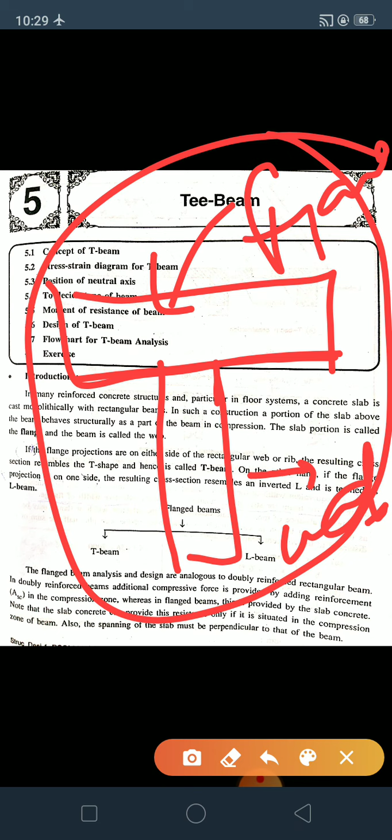If the flange projections are on either side of the rectangular web or rib, the resulting cross section resembles a T shape and hence it is called a T-beam. The cross section resembles the T shape, hence T-beam. On the other hand, if the flange projection is on one side only, the resulting cross section resembles an inverted L and it is termed an L-beam. So that is the difference between T-beam and L-beam.

If the flange projects on both sides of the rectangular web or rib, it is a T-beam, and if the flange slab projects on only one side, it is an L-beam. So flanged beams have two types, T-beam and L-beam. The analysis and design of flanged beams are analogous to the doubly reinforced rectangular beam. In a doubly reinforced beam, additional compressive force is provided by adding reinforcement in the compression zone.

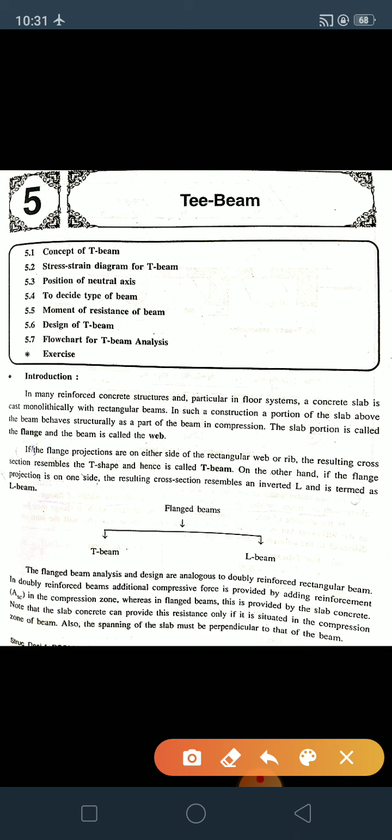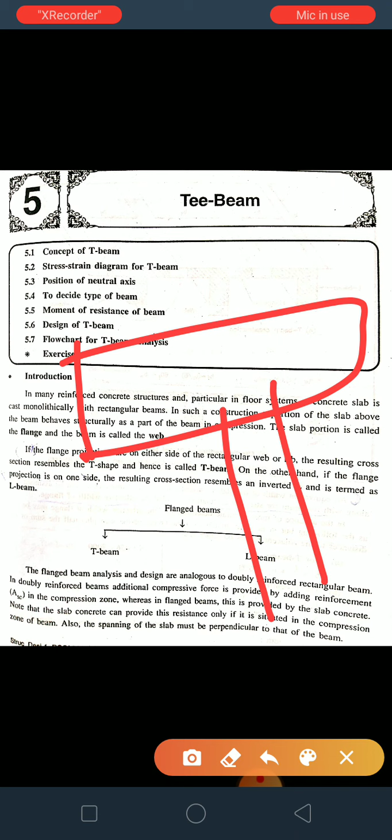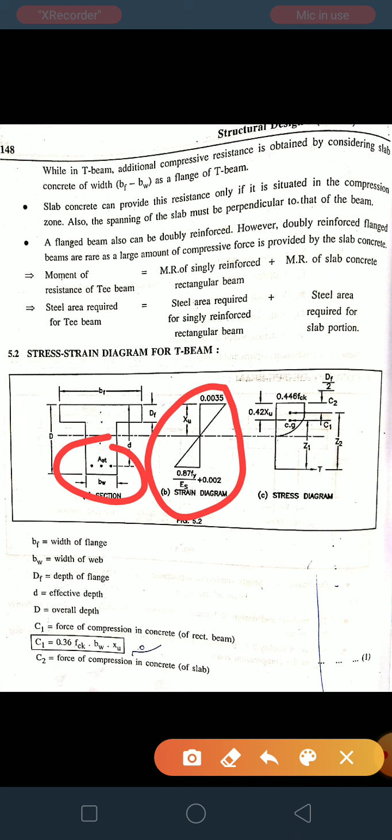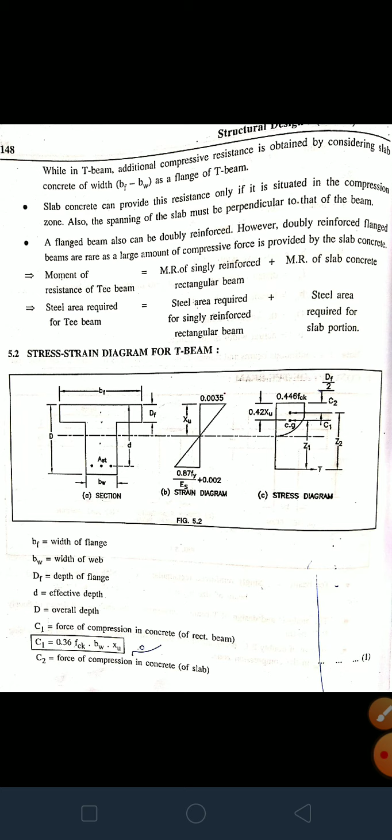So here BF is equal to width of the flange, BW equal to width of the web, DF is equal to depth of the flange, small d equal to effective depth, capital D is equal to overall depth, C1 equal to force of compression in concrete, C1 is equal to 0.36 FCK BW into XU, and C2 equal to force of compression in concrete of slab. So C2 is equal to 0.446 FCK (BF minus BW) into DF.

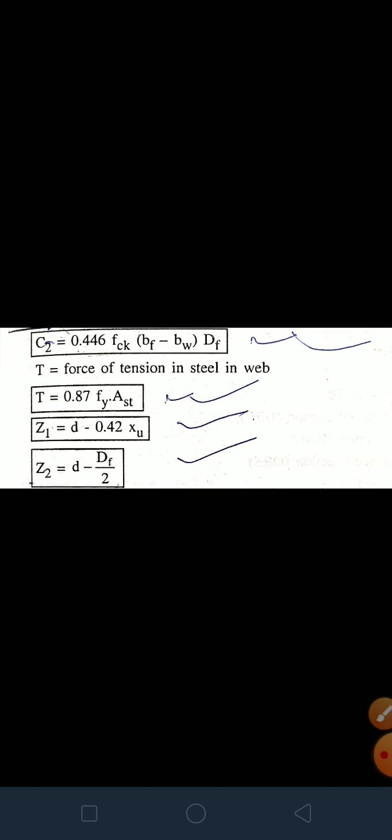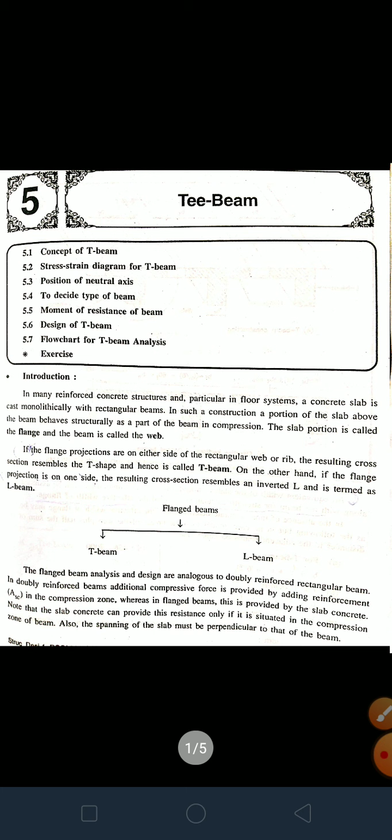T equal to force of tension in the steel in the web, T equal to 0.87 FY AST, Z1 equal to d minus 0.42 XU, Z2 equal to d minus DF by 2. This formula is the same we saw in an RC beam. So it is also given in IS 456 2000. So this is some basic concept and introduction about T-beam.

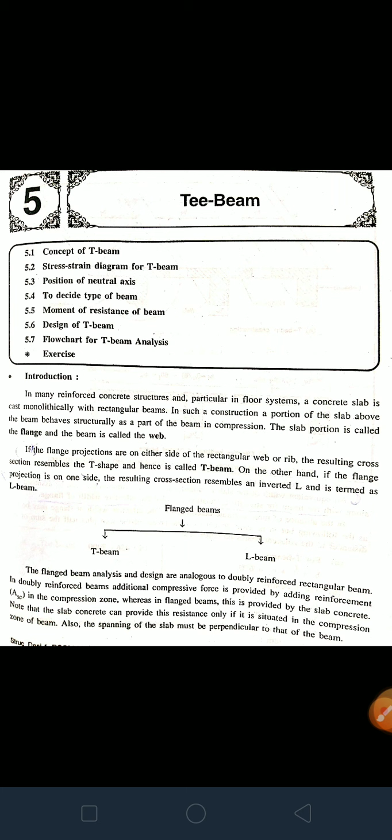Whereas in a flange beam, this is provided by the slab concrete. Note that the slab concrete can provide this resistance only if situated in the compression zone of the beam. Also, the spanning of slab must be perpendicular to that of the beam. So here is some idealization of floor system using a flange beam. So it is a very important chapter. Now how we find effective width of the flange.

So an equivalent width of the slab with uniform stress distribution that can be assumed to act along the beam with its strength calculation.

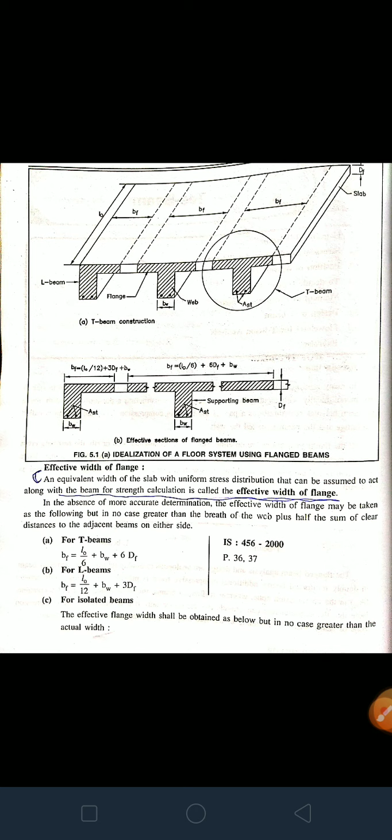So for a T beam, BF is equal to L0 by (L0 by B plus 4) plus BW. For an L beam, BF is equal to 0.5 L0 by (L0 by B plus 4) plus BW, where BF is equal to effective width of flange, L0 distance between points of zero moment in the beam, BW breadth of the web or rib, DF equal to thickness of flange, B equal to actual width of the flange.

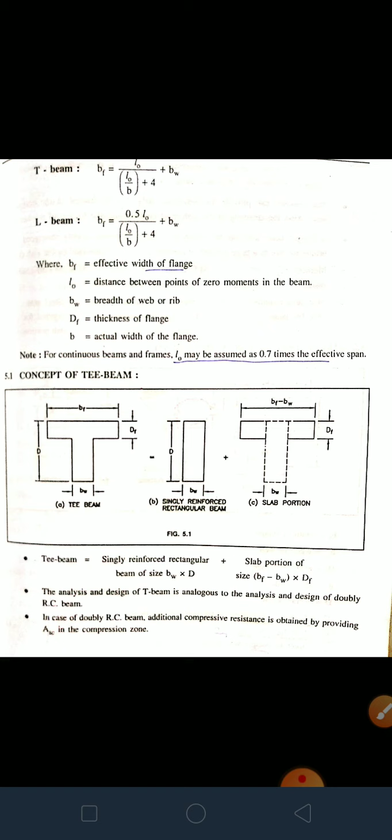Now here is a note. For continuous beams and frames, L0 may be assumed as 0.7 times the effective span. So this is the effective width of the flange.